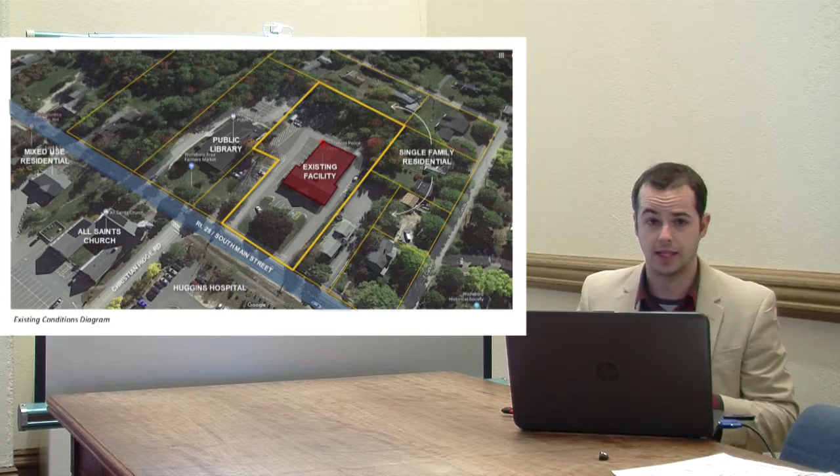So let's talk a little bit about what the needs are moving forward. And we did a couple things here. We looked not only at our existing condition need, the needs that are necessary for the police and fire today, but also what our needs might be out to 2032. We wanted to take into account what our growth potential is as a community and what the staffing needs might be into the future as well, based on changing conditions that we see in fire and law enforcement.

I would also note that a lot of these needs are also related to best management practices on the fire side of things and federal requirements on the police side of things. There are certain separations that are needed for keeping juveniles from others, certain requirements when you're actually unloading prisoners in a sally port, for example.

The police and the fire department folks are the best to talk about those particular needs, but this study actually reflects those because we want to make sure that we aren't really hamstrung in the future the way that we are today.

Our current facility, when it comes to being a potentially accredited police department, doesn't allow us to achieve that, so we need to make some significant upgrades moving forward. And again, the police chief could discuss that in more detail at a later time. The executive summary of our space needs, and I'll get into the details in just a second.

Again, I mentioned we have a 13,000 square foot facility currently. The 2018 need, as Lavallee Brensinger helped us project, is actually 29,000 square feet. So that's really 2.5 times the existing facility that's being provided. So you can see that we really don't have the space available and necessary for both of those departments to carry out their functions appropriately. So we have really significant needs.

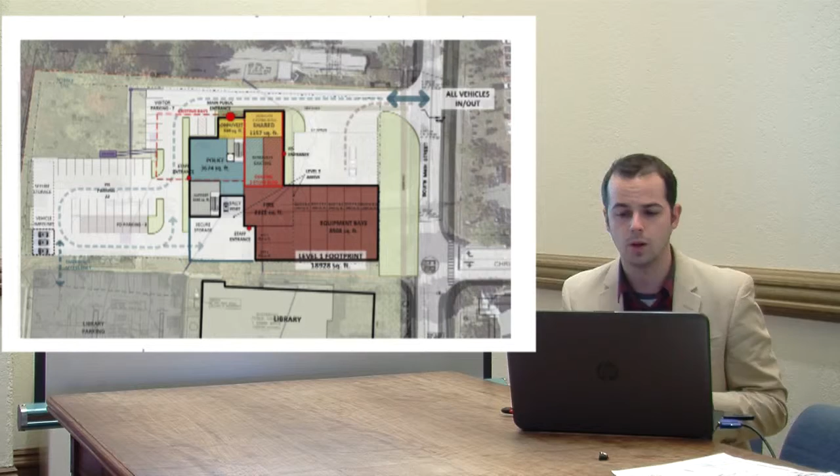Let's dive in a little bit more on the space needs, though. I just want to talk about that. The first category of needs is really common and shared space. These are sort of the public spaces within the public safety building that we're proposing, and of course we're proposing a joint building. We need some interview rooms. We have a community room that actually doubles as our emergency operations center for any kind of emergencies that take place in town. We want to have some space available for that.

We have public restrooms, a public lobby, an entry vestibule. All of that space feeds into the need for about 2,700 square feet that will be needed for this particular common and shared space between the police and fire departments. So that's the first category that we look at. Next section is record storage. These are record storage needs for the police department primarily. The recommended need for that out to 2032 actually is 600 square feet of storage space necessary.

Community resources, this is for our animal control folks and canine storage. The total need here being between 200 square feet and 300 square feet between 2018 and 2032. So again, 200 to 300 square feet necessary there. Administration, this is on the police side of things. This is for the chief of police, the captain, some small meeting rooms, potential intern workspace, some additional file storage, and a small conference room. The need there being about 850 square feet.

After we went through that programming phase, the next part of the process was really to look at the site and what ability the site has to provide those necessary 29,000 square feet.

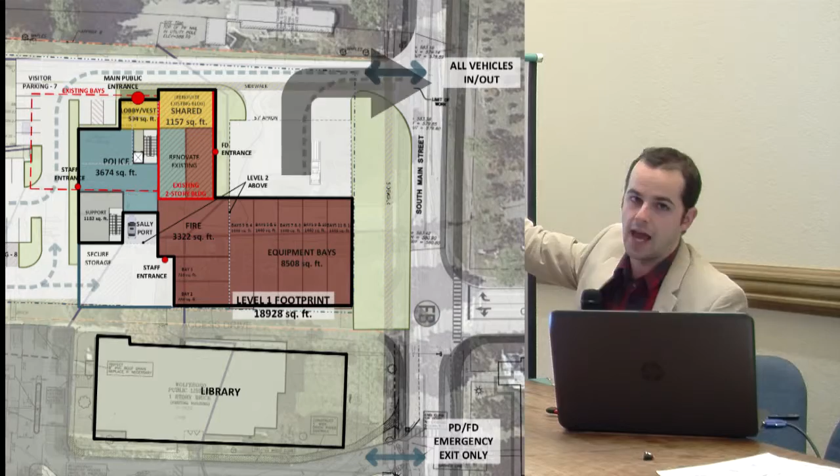So we went through 3 concepts. I won't present the 3 concepts today, but we ultimately decided on this concept. I just want to quickly walk you through this and talk about what's going on. So this is South Main Street here. This is the library facility, which will be reconstructed obviously in 2018 and 2019. The proposed building actually has the apparatus bays right here adjacent to South Main Street facing towards downtown. So fire trucks would actually exit here and turn on to South Main Street. There would be one in and out as opposed to the two entrances that we have right now.

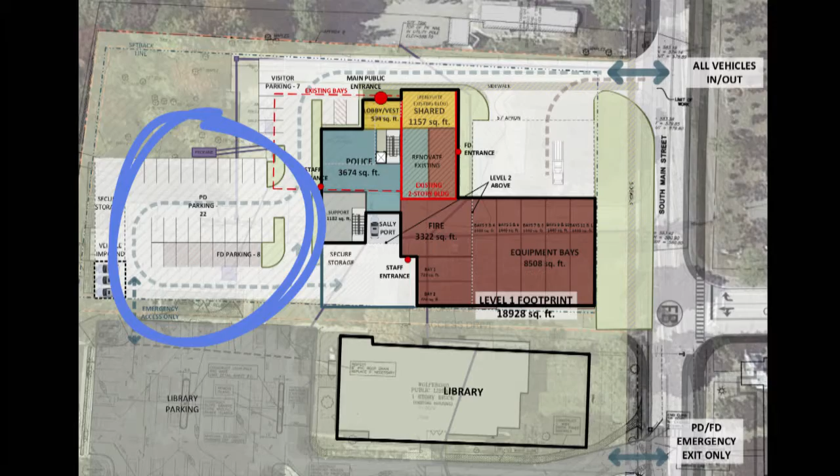Additionally, the parking would actually be pushed to the rear of the lot. Currently, we do have some parking along the side here adjacent to the library and out front. That parking would really be pushed towards the rear of the lot to get it away from the road and to really push as much of the emergency services towards the front of the lot as possible. Here you can see there's some white space. That's actually where the Sally ports and some small parking area for department vehicles would be. There would be an access point there as well for both departments so that they could get into the facility.

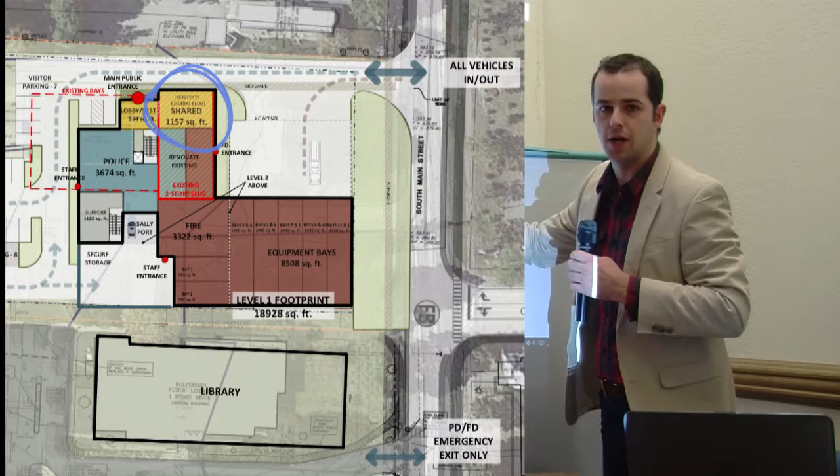You'll see that the blue area is really the police department area, and then the red area here and here, those are where the fire departmental support and administrative functions would be located. The entrance for the public would be in this yellow area up here. The public would have the ability to park in this visitor area right here and walk directly into the vestibule lobby area, and then we'd have our emergency operations center right here that would be publicly accessible as well. So again, fire department directly adjacent to South Main Street, police department sort of towards the back, parking to the rear of the site, and then also the shared space being up here.

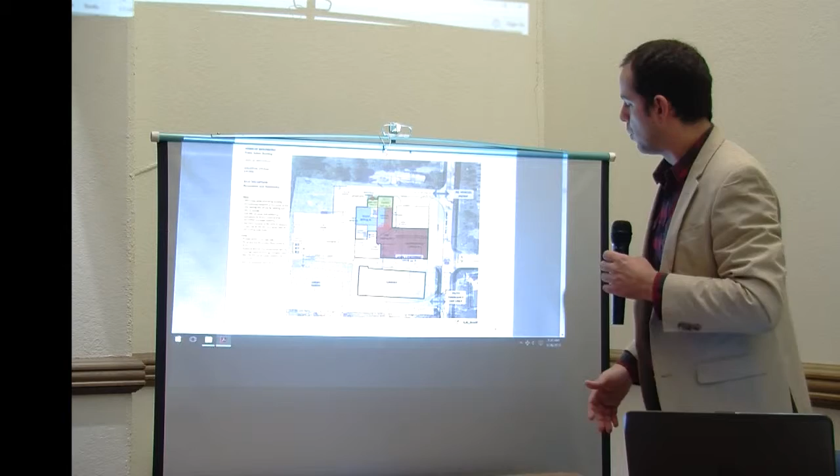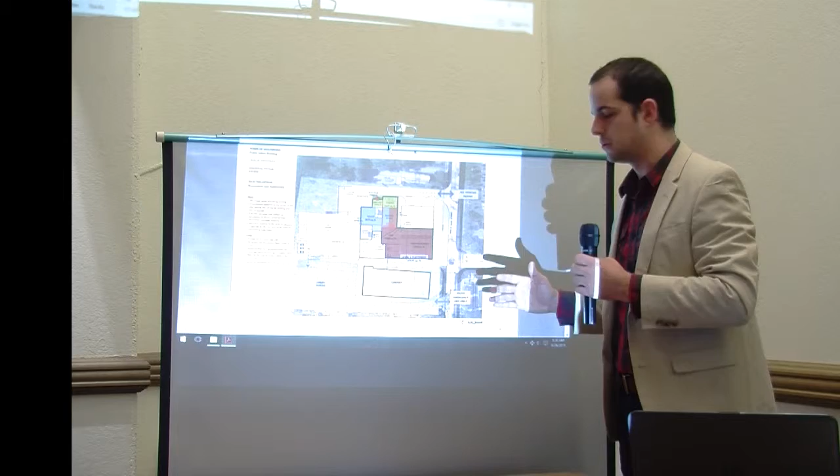One thing I want to point out is that the zoning in this area, which is really the planning department's function in a lot of ways, really requires that buildings be pushed to the front of the lot. And the reason for that is that we want to create a more village-like feel out on South Main Street. So one of the big considerations when looking at the three concepts was that this was the concept that really pushed that building as far to the front as possible, aligned it with the library, and created that village-like corridor that we're really going for in our downtown area. So this concept is really the preferred concept.

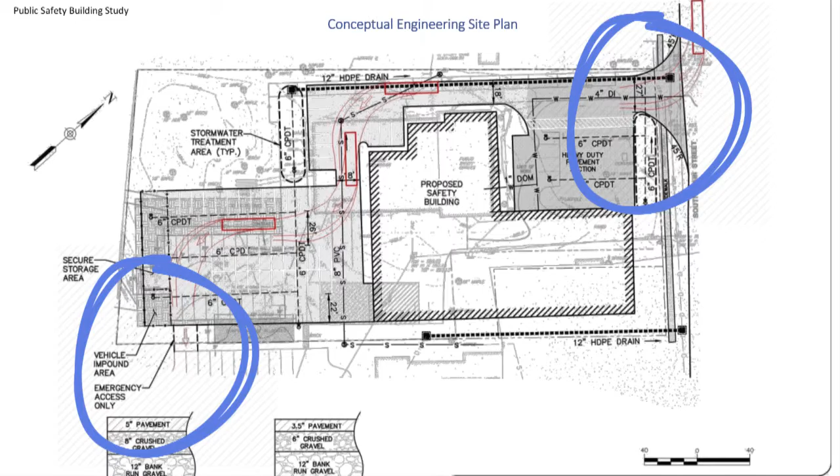I just want to quickly show you how the site design would function in relation to the library. The library parking area is being reconfigured, but we do anticipate that we would have at least some emergency access over this area right here in the event that our sole entrance and exit is blocked. So we would maintain some emergency access in the event of some emergency that might happen on either one of these lots, which I think is a real advantage of having this sort of campus-style development on South Main Street.

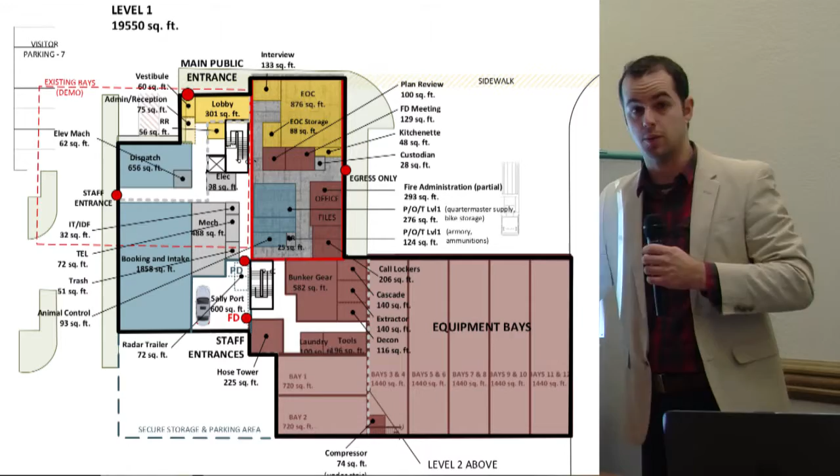This is just a breakdown of the internal space, but you'll see again we have the same design, the fire department here, the police in the rear. This actually breaks down, when we look back at our space program, where those different evidence, holding cells, departmental support functions would be in the building. So we've actually gone through the internal building modeling process as well as part of this work.

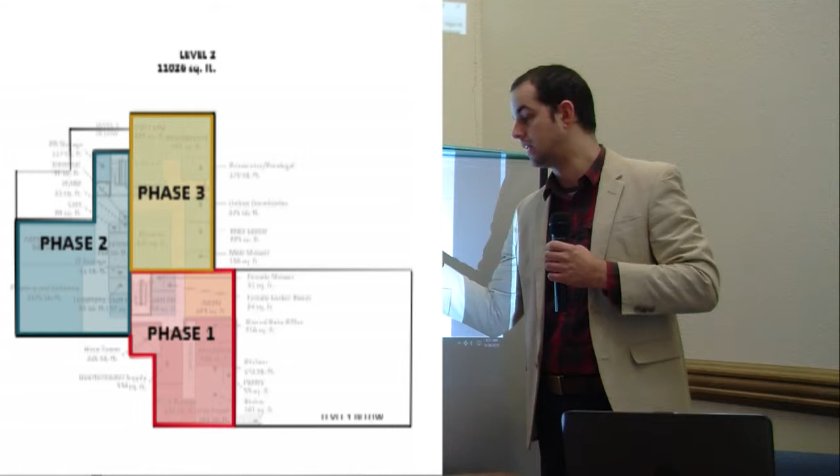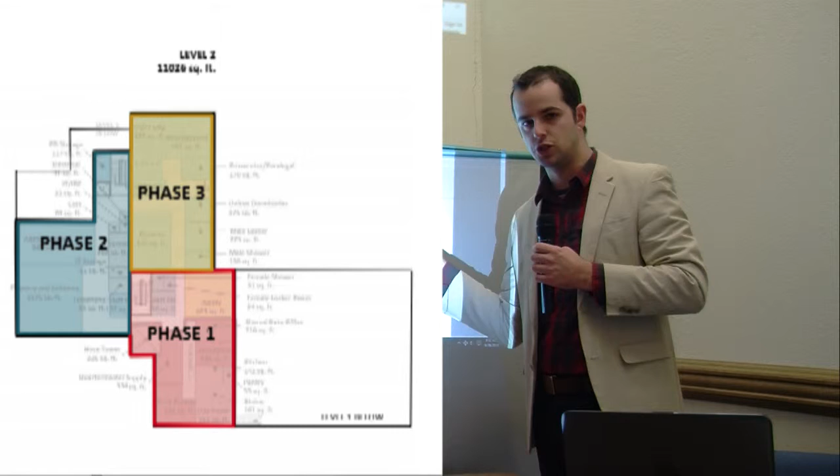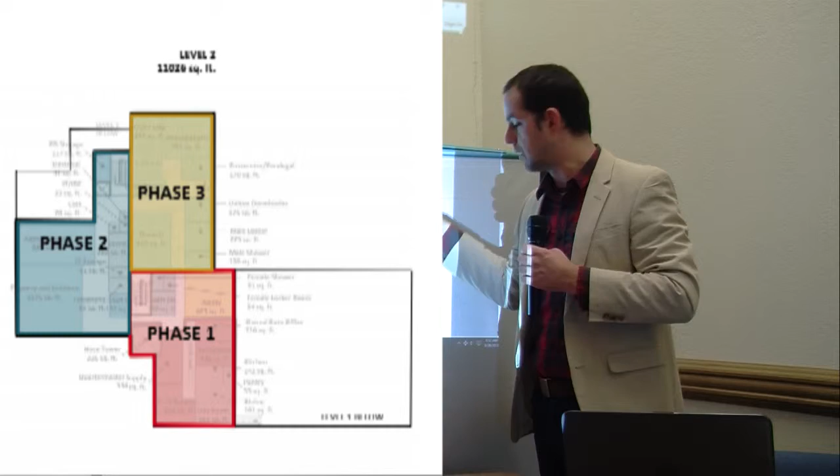This is a phased construction design, and the reason for that, which I should have mentioned at the beginning, is that we are actually proposing to maintain the existing building skeleton for at least the front of the building. That's this phase 3 area right here. Phase 1 and 2 would be new construction. Phase 3 would be reserved to the end because we'd maintain departmental functions in that existing building as long as possible. Once phases 1 and 2 are complete, we move fire and police into those respectively and actually move them out of phase 3 to allow for renovation to happen in that section of the building. So this would be a phased construction project.

Just some more detail on what the space plan would be internally. The equipment bays, I mentioned this is parking area with the Sally port being here. Staff entrances here, and then the public entrance up here adjacent to that parking area that we talked about just a few seconds ago. More detail on the second floor.

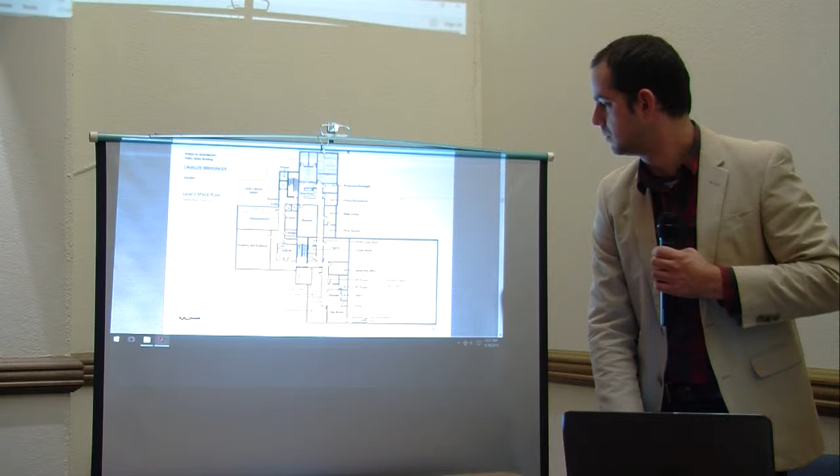This would be a 2-story building as proposed. That's one of the ways that we achieved actually getting that 29,000 square feet on the lot. And now for the really exciting pieces of this. What would this look like? And we understand these are really preliminary renderings, so we're not sure the building would actually look like this, but based on our space design, this is what the building might look like in the future.

This is probably the best rendering, as this is really from the streetscape. This is South Main Street going this way. These are the apparatus bays heading out towards downtown. This is the existing portion of the building that would be renovated. Public parking back here, parking lot back here, library over here. And you can see that we've tried to really fit with the traditional character of what's going on this site moving forward into the new design.

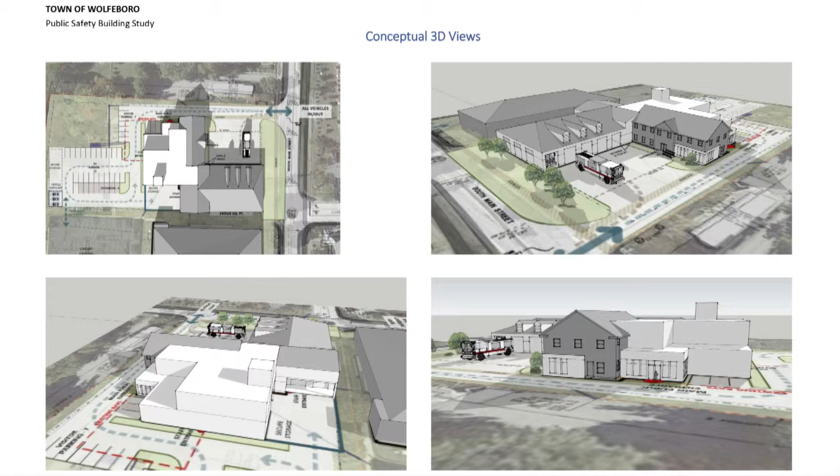This is the side rendering with the apparatus bays facing this way. This is looking from the back of the lot towards South Main Street out here. You can see a fire truck exiting here from the apparatus bay. So this would be the view from the rear of the lot with that parking area there for police vehicles and fire vehicles. And this is sort of just an overhead view looking down on the structure.

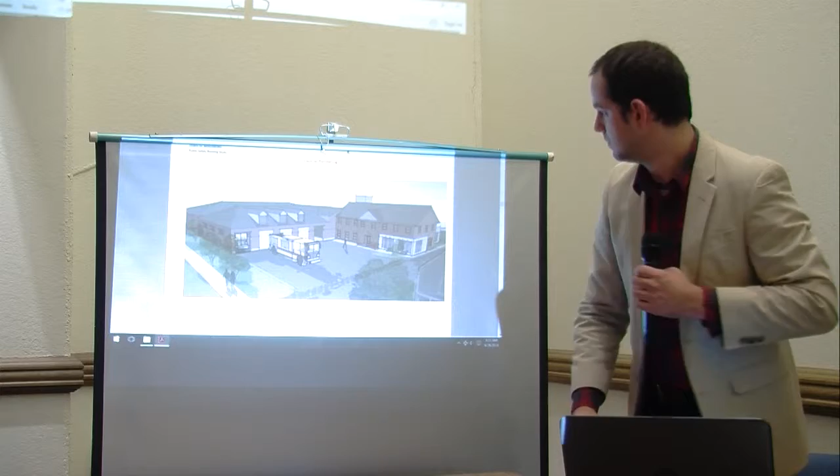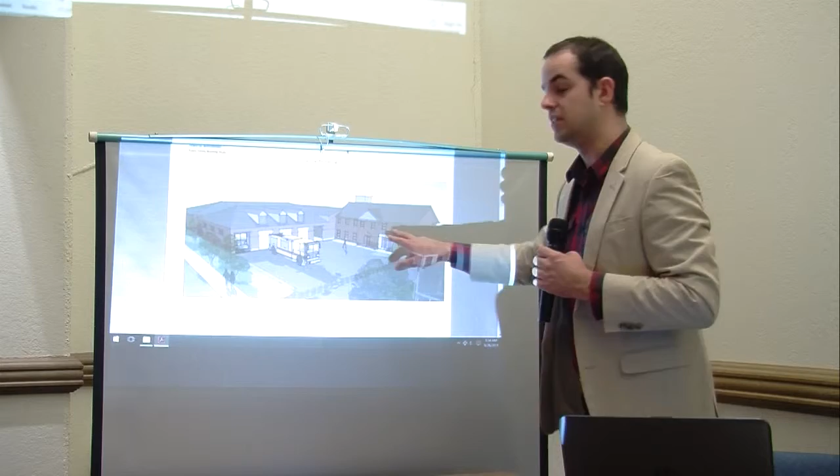This is a nice little zoomed in focus view with some traditional brick coloring being used. Again, this is the view of South Main Street going right here, a sidewalk here, and then looking at the apparatus bays and the existing building that is to be renovated right in this area right here.

So we also went through the process of actually scoping out the construction costs for this, and what we were looking at is at least providing a preliminary budgetary figure to the Board of Selectmen. And I think that that's really one of the critical things about this project. Originally in the CIP, this project had been scoped at about $5 million in total cost. As we went through the design process and looked at our realistic space programming needs, we're realizing that we have much more significant needs than originally expected.

As a result, going through the construction cost estimating side of things, we actually came up with a preliminary budgetary figure of $11.9 million, which is more than double the amount being proposed in the CIP process. So we have a much clearer understanding of what our needs are and what the associated costs might be. And as a result, we're thinking that we might need to go back to the drawing board and explore other concepts within the community. But one of the critical things that we know now after going through this process is that we have a good understanding of what our space needs are from the 3 departments that I've discussed today.

So as a result, in August, when this presentation was done to the Board of Selectmen, the Board of Selectmen actually charged the Feasibility Study Committee with working with Lavallee Brensinger moving forward to look at other locations within the community that might provide the space needed for this type of facility. We'll also explore whether or not splitting of the facilities might be something that may need to be done in order to reduce costs moving forward. But again, we don't expect the space needs themselves to change significantly. We only expect to look at whether there might be other ways to phase this construction or split the construction in a way that minimizes the impact to the taxpayers.